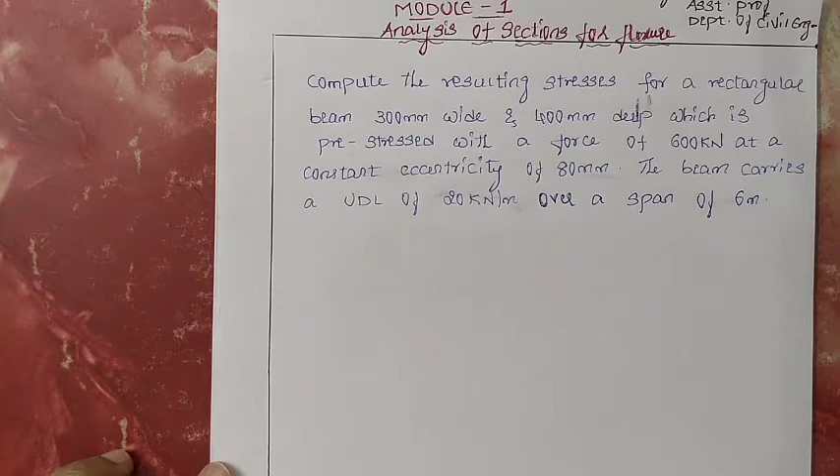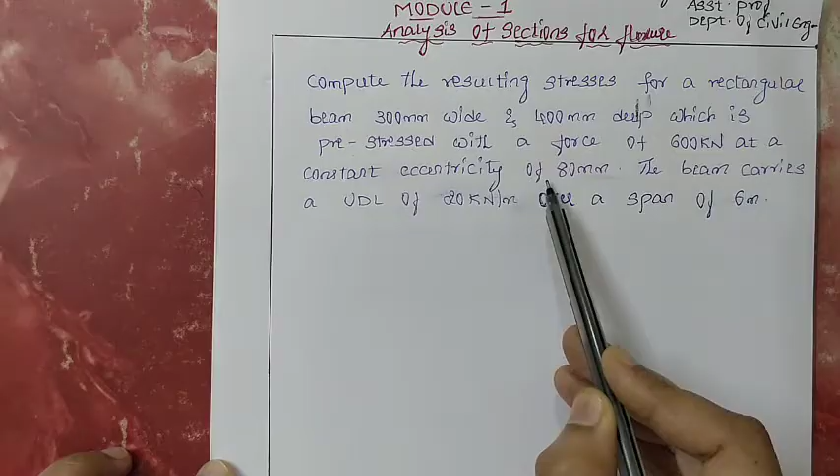The first problem: Compute the resulting stresses for a rectangular beam 300 mm wide and 400 mm deep, which is pre-stressed with a force of 600 kN at a constant eccentricity of 80 mm. The beam carries a UDL of 20 kN per meter over a span of 6 meters.

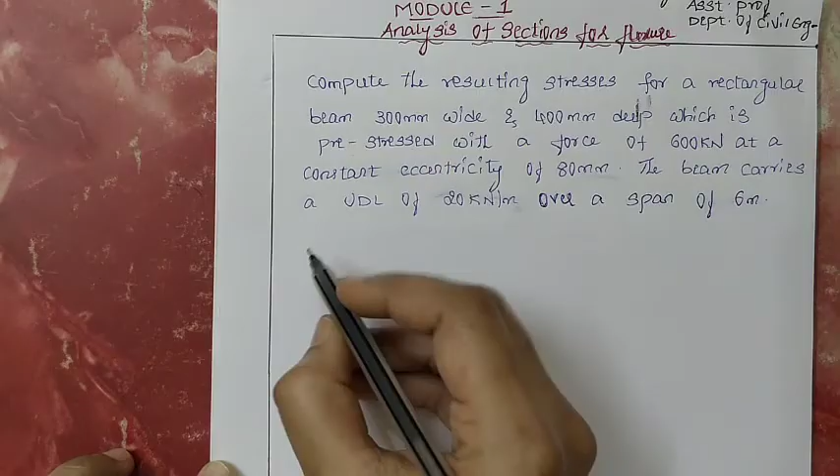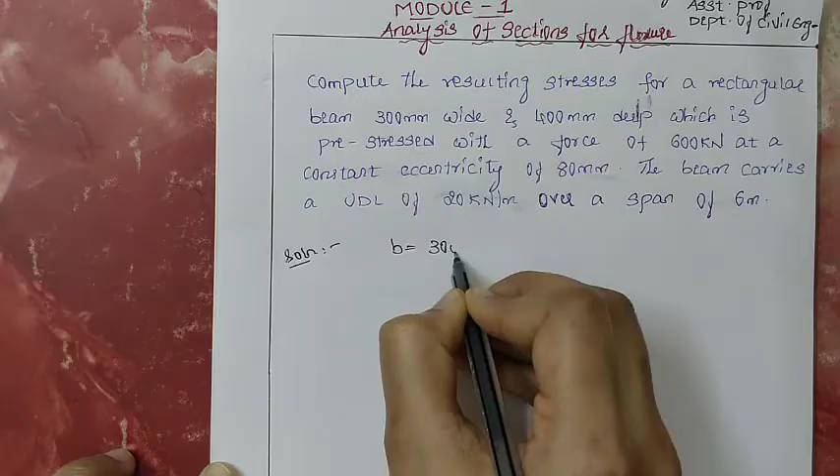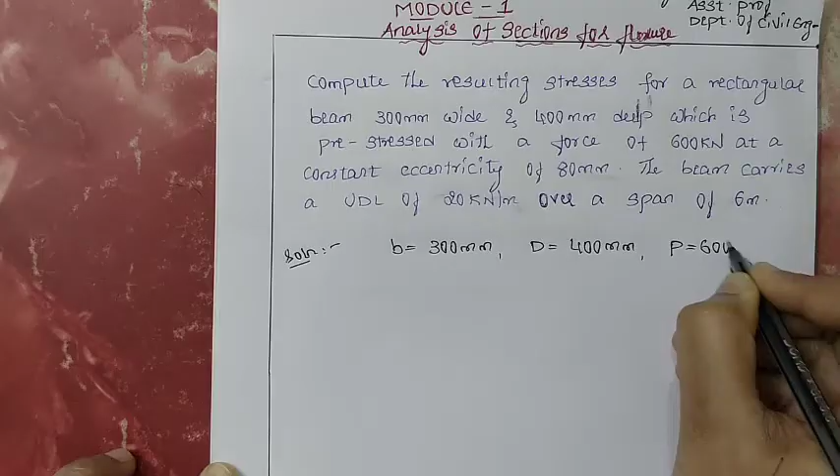The first step is to write down the given data. The cross-sectional dimensions of the beam: width is 300 mm, depth is 400 mm, and the pre-stressing force given is 600 kN, acting at a constant eccentricity, denoted by e, of 80 mm.

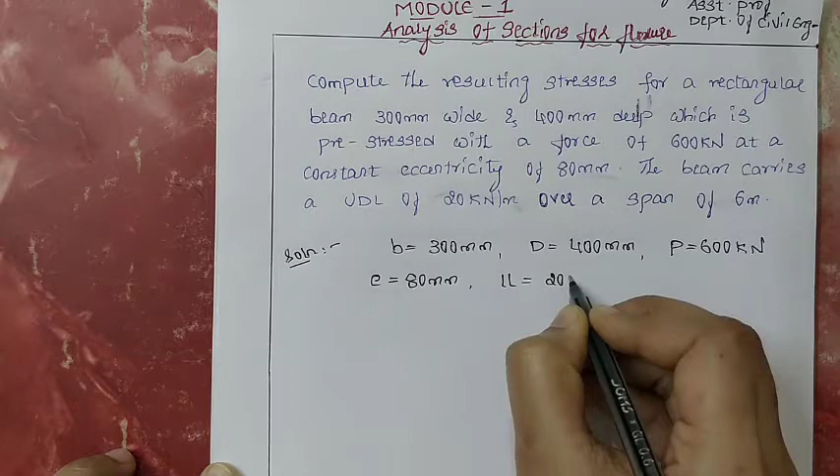The live load condition given: it carries a UDL of intensity 20 kN per meter, and the span given is 6 meters.

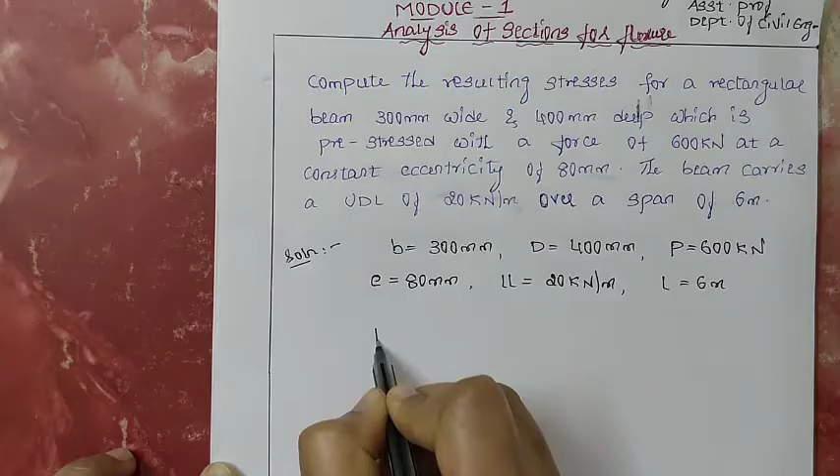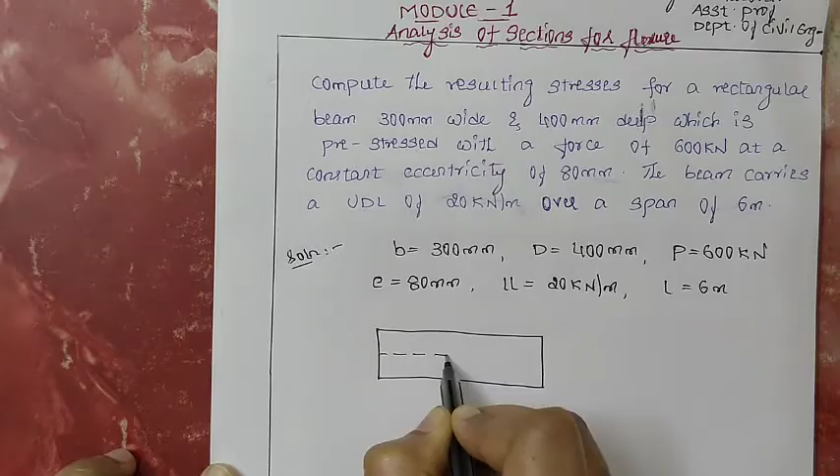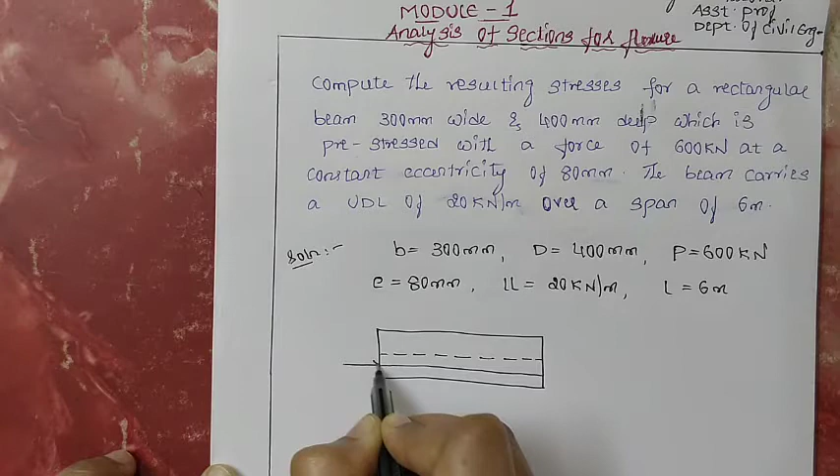I will draw the figure: the cross section and the longitudinal section of the beam. This is a rectangular beam. This is the neutral axis. Below the neutral axis, you place the tendon. The magnitude of pre-stressing force is given, and it is specified with a constant eccentricity of 80 mm. It is understood that it is a straight cable.

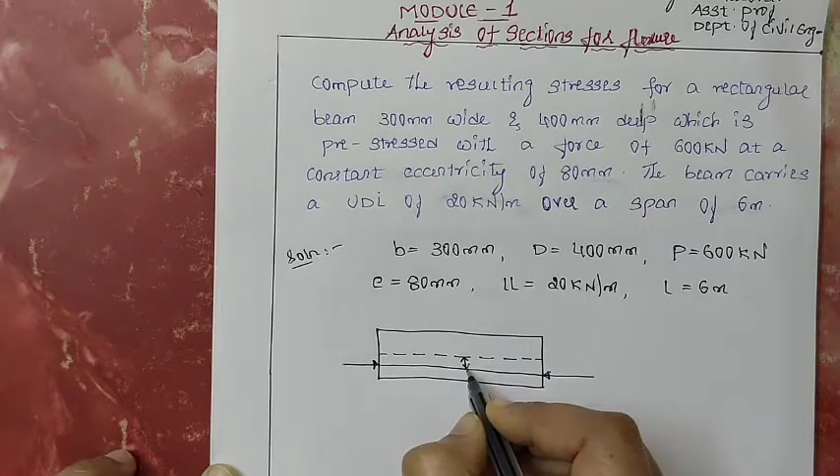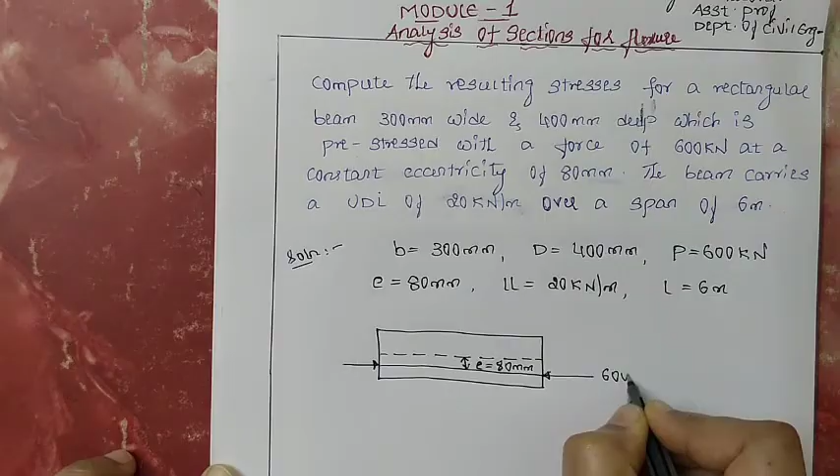Eccentricity is the vertical height from the neutral axis to the tendon - that is your eccentricity. That value is 80 mm, and the magnitude of pre-stressing force given is 600 kN.

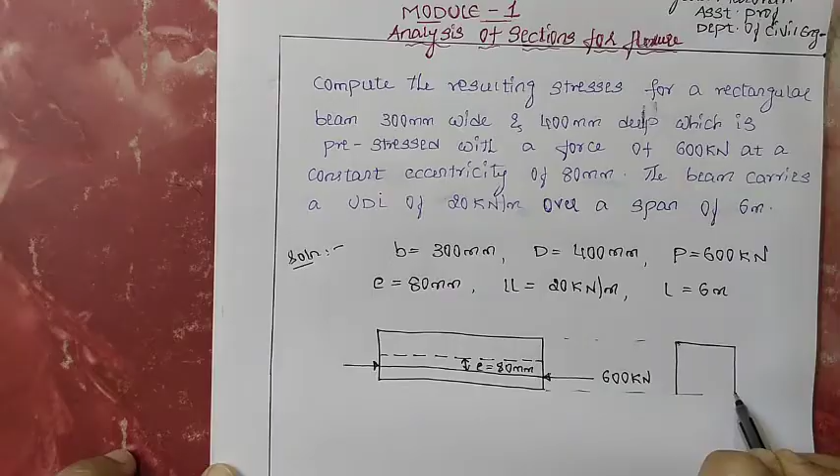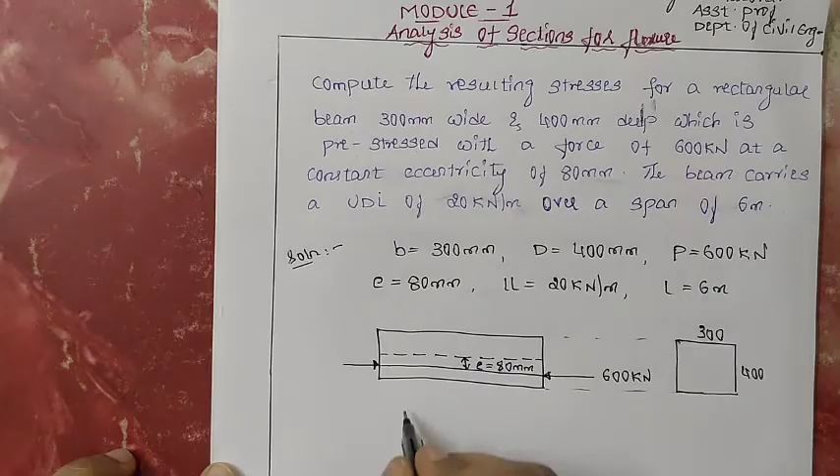The cross section of the beam: width is 300 and depth is 400. Assume the density of concrete as 25 kN per meter cube.

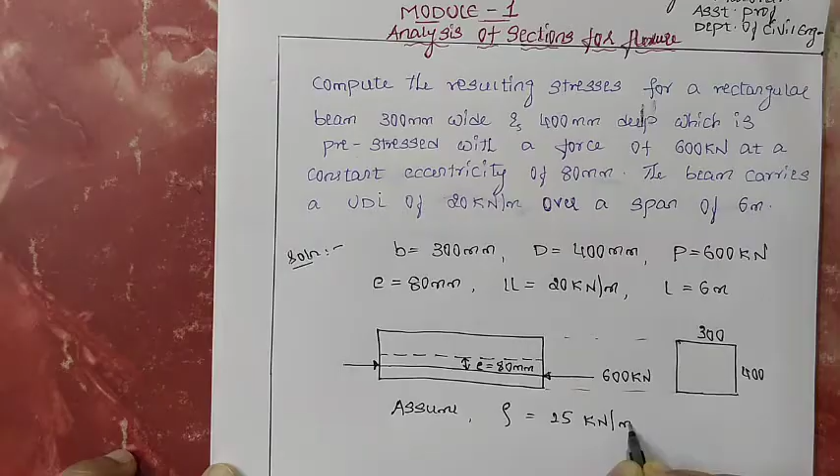You need to calculate the resulting stresses at the top as well as at the bottom.

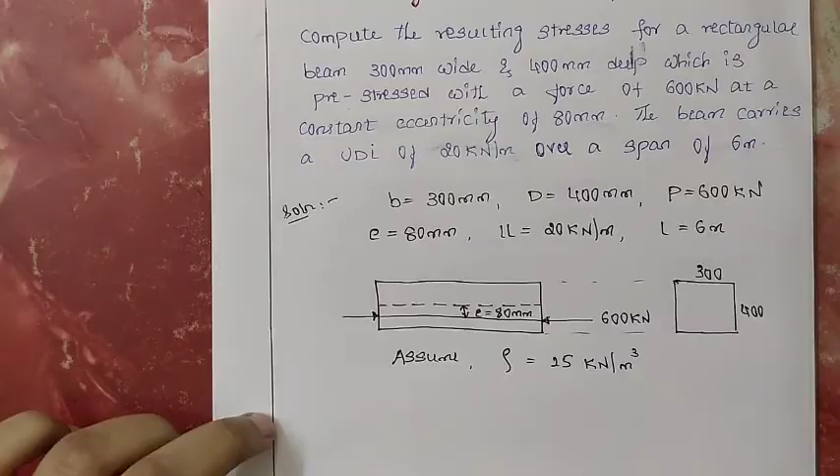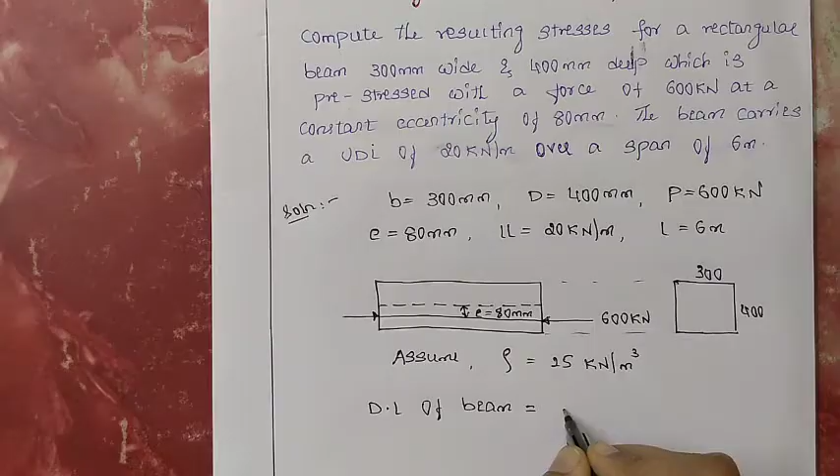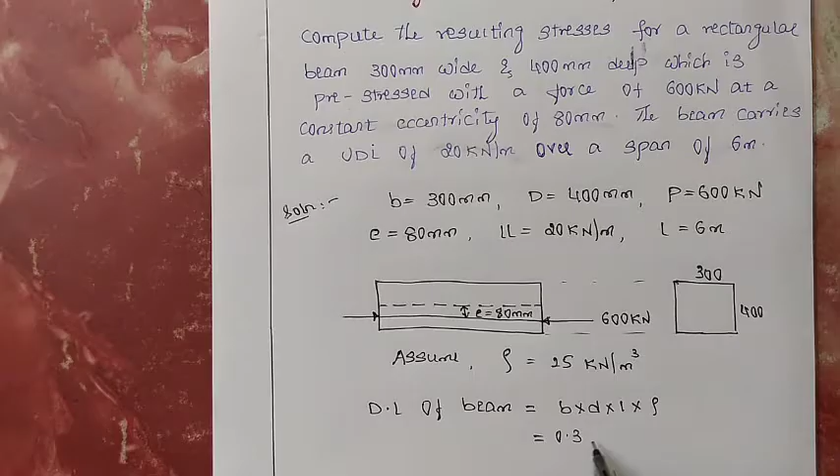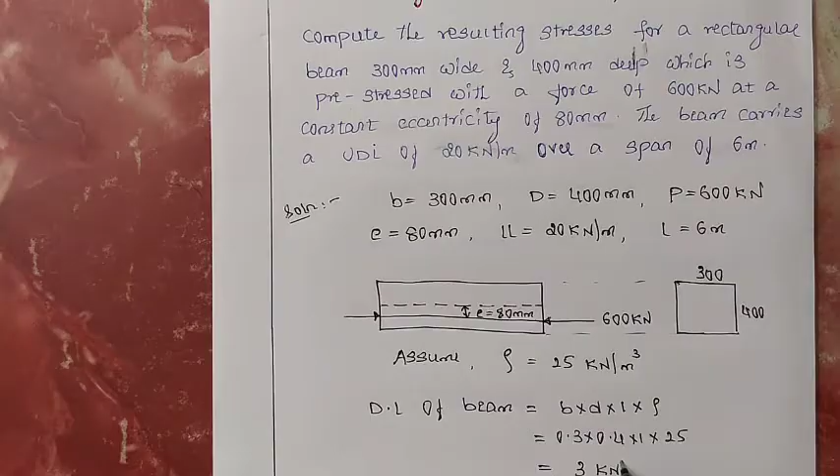First, calculate the dead load of the beam. Dead load of the beam is given by the cross-sectional dimension of the beam, B into D, into length (taken as 1 meter) and the density. Substitute values in meters: width is 0.3, depth is 0.4, into 1, into density 25. The dead load of the beam comes out to 3 kN per meter.

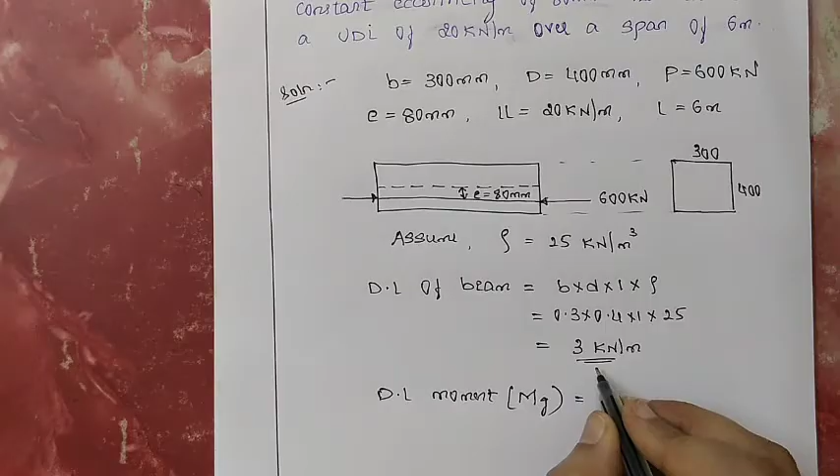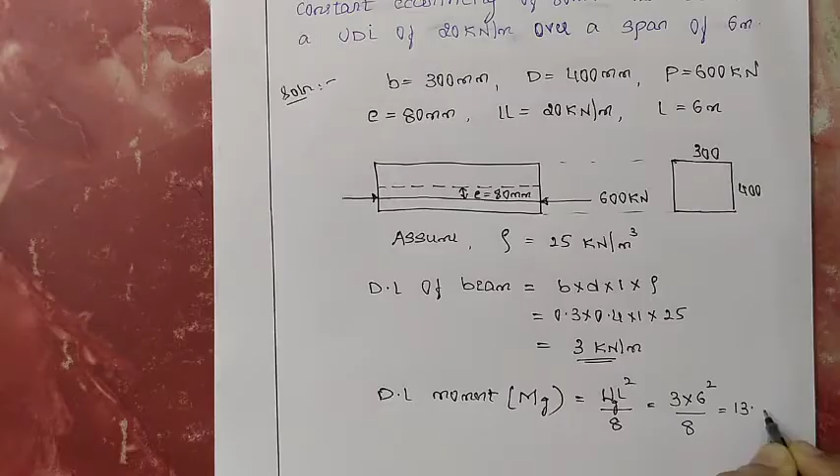Next, calculate the dead load moment, denoted by Mg. For a beam carrying UDL, the standard bending moment equation is WL square by 8. Here we are calculating the dead load moment, where the load is dead load, denoted by G, which is 3, and the span is 6 meters. So 3 into 6 square divided by 8 gives 13.5 kilonewton meter.

The live load given is 20 kN per meter - note the intensity of that live load is in kN per meter. Then the live load moment, denoted by MQ, equals WQ L square divided by 8. WQ is 20, L is 6, squared divided by 8, giving 90 - sorry, this is not per meter, it is kilonewton meter.

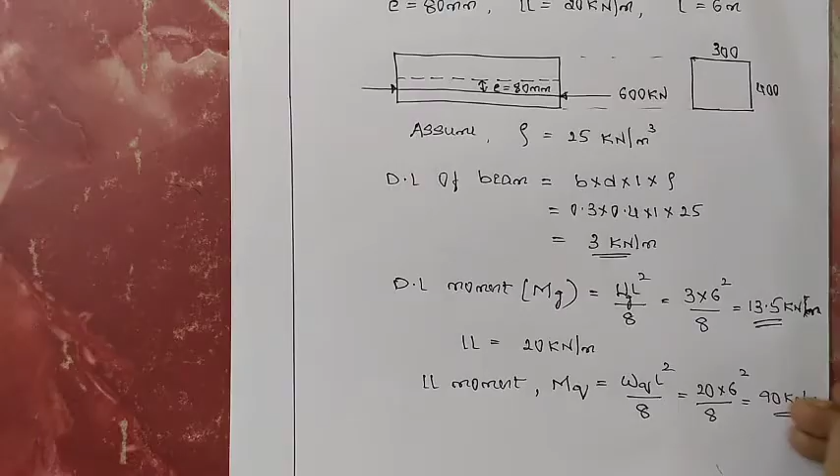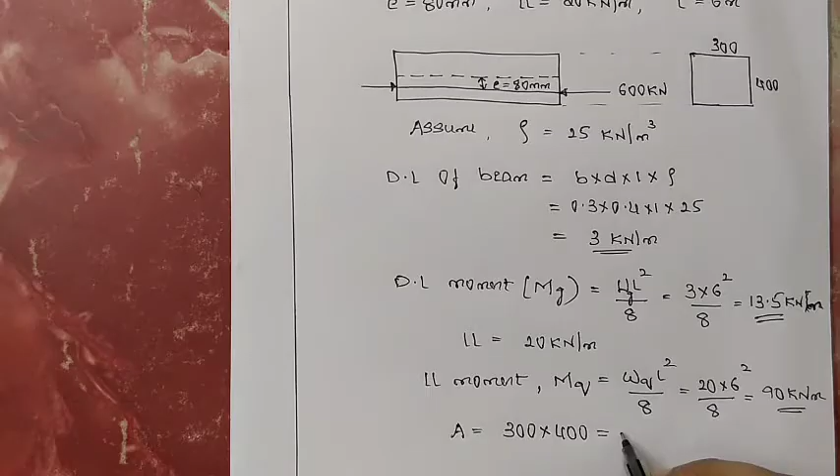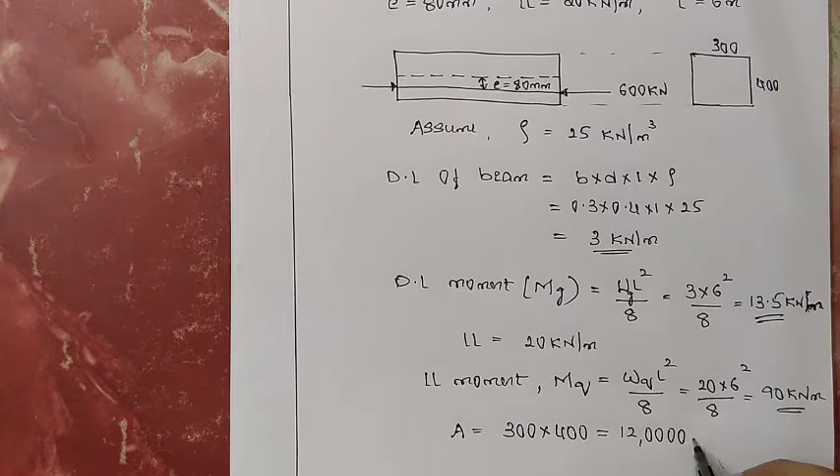Then calculate the cross-sectional area of the beam: B into D, that is 300 into 400. The section is rectangular, giving 1,20,000 mm square.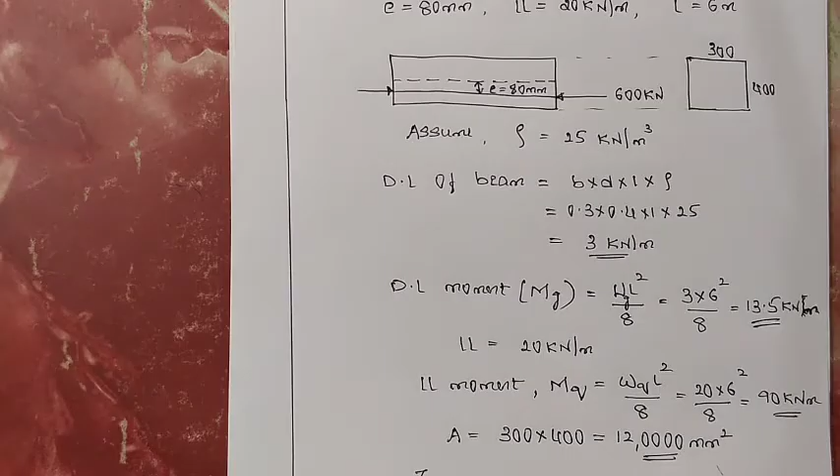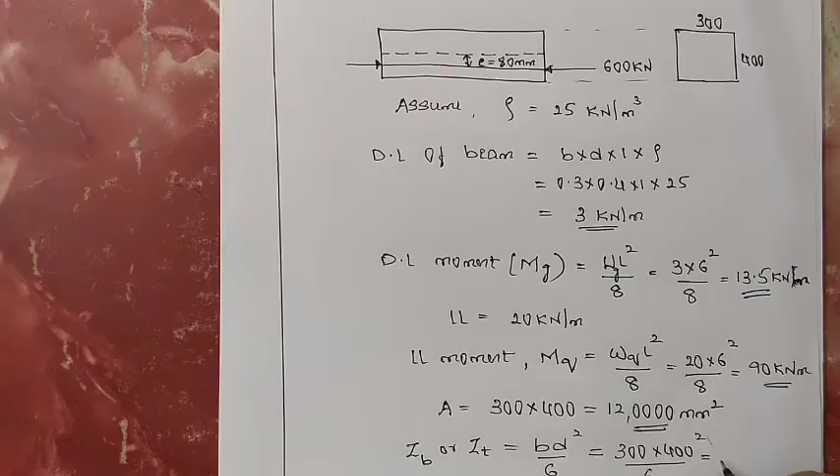Then calculate the section modulus. For a rectangular section, the section modulus at the top and at the bottom is the same: ZB or ZT equals BD square divided by 6. Substituting values, width is 300, depth is 400 squared divided by 6, giving ZB equals 8 into 10 to the power of 6 millimeter cube.

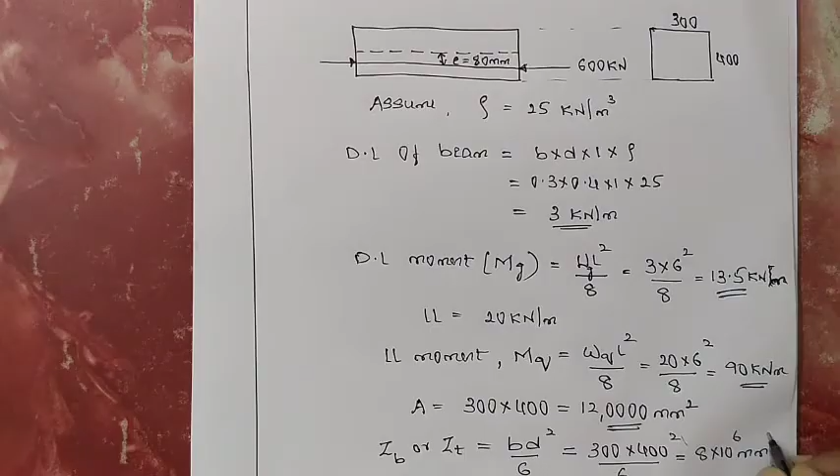Then calculate the resultant stresses at the top as well as the bottom fiber.

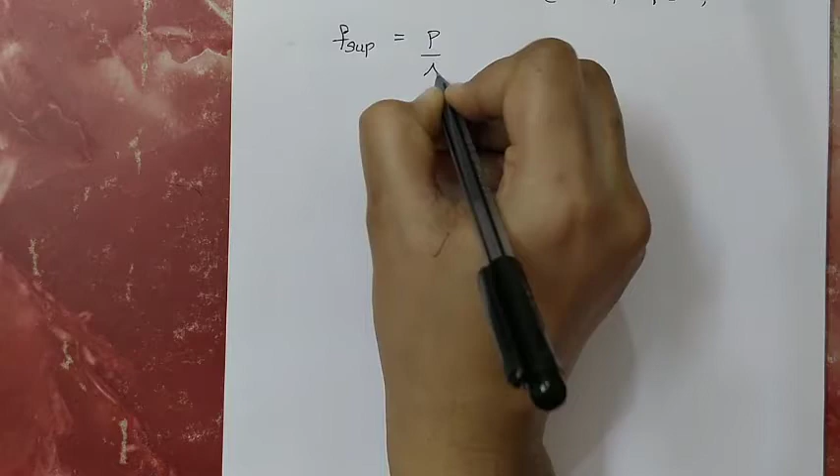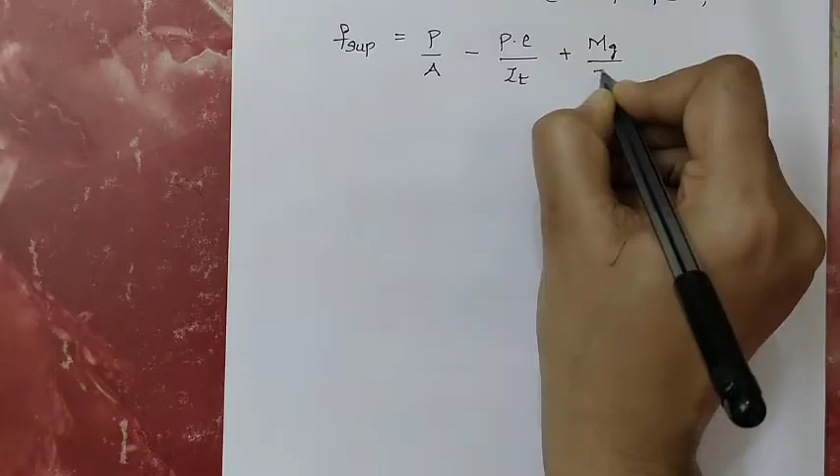Stresses at top fiber, it's given by F superior, or you can call it F top. It is given by P by A minus P into E divided by ZT plus mg divided by ZT plus mq divided by ZT.

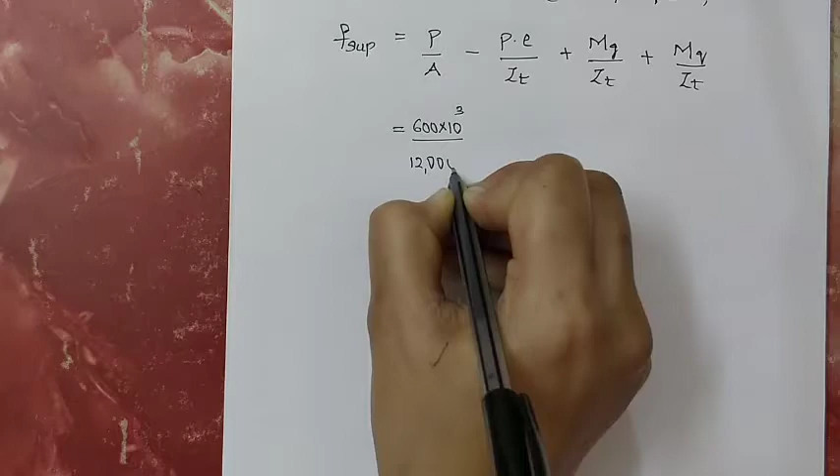Substitute all the values. That is, P is 600 kilonewton, it is 10 to the power of 3 divided by area 120000 minus 600 into 10 to the power of 3. Eccentricity value it is 80 divided by ZT it is 8 into 10 to the power of 6 plus mg value, dead load moment 13.5 into 10 to the power of 6 divided by 8 into 10 to the power of 6 plus live load moment, it is 90 into 10 to the power of 6.

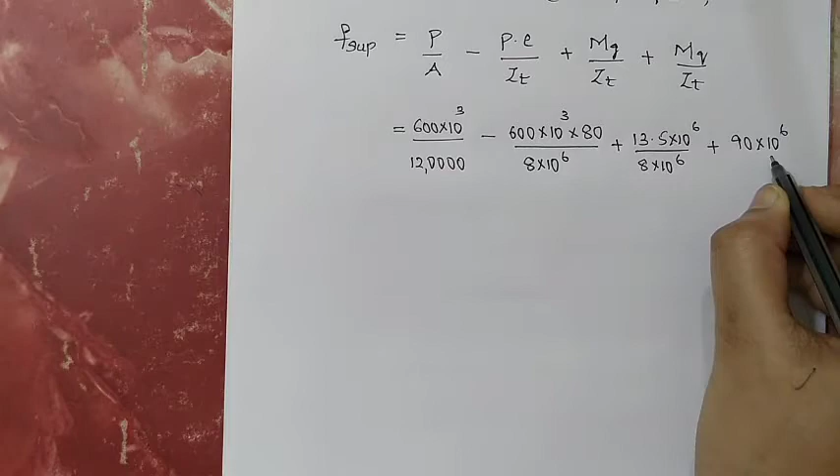10 to the power of 6, what is that? The moment will be in kilonewton meter. While substituting in this F superior equation, all the units should be either Newton mm or mm. That is 8 into 10 to the power of 6. Upon simplification, you will get F superior, that is resultant stresses at the top.

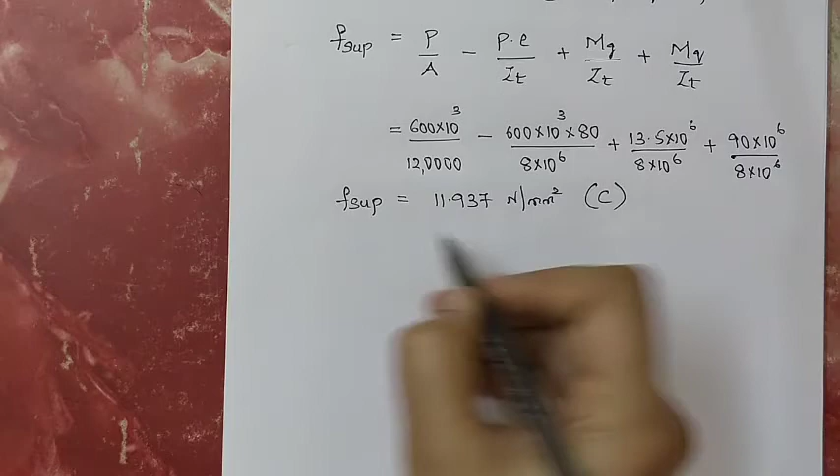It will be 11.937 Newton per mm square. Positive indicates it is compressive in nature. This is your F superior.

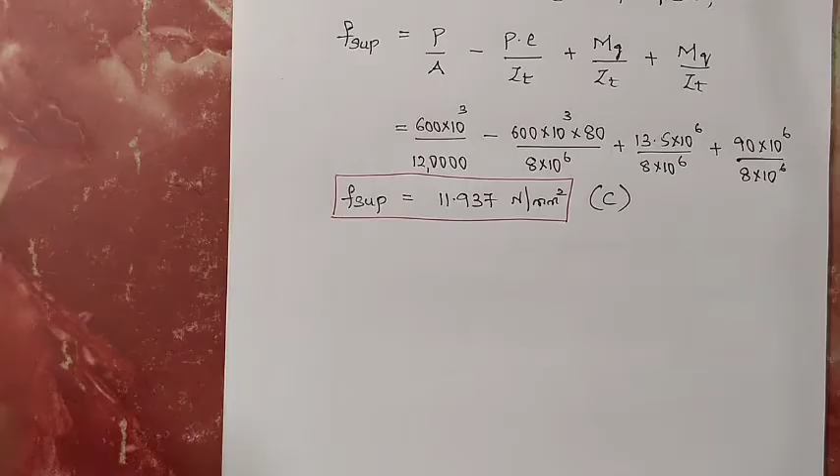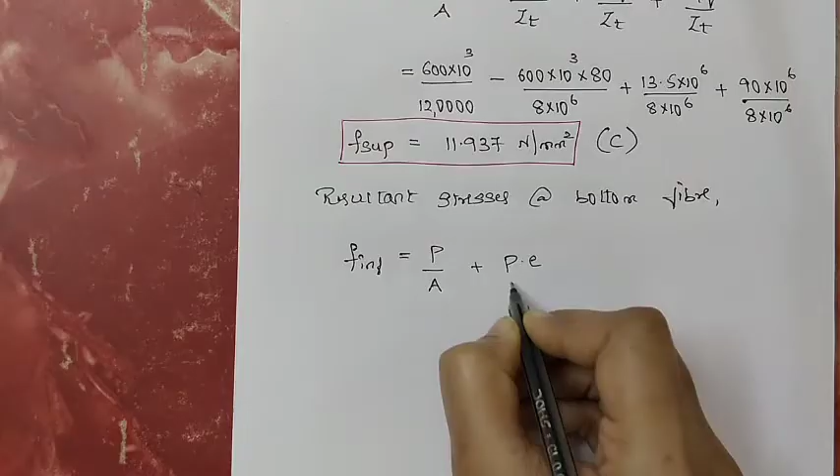Next, similarly calculate resultant stresses at bottom fiber. Resultant stresses at bottom fiber. It is denoted by F inferior or F bottom, that will be equal to P by A plus P into E divided by ZB minus mg divided by ZB minus mq divided by ZB.

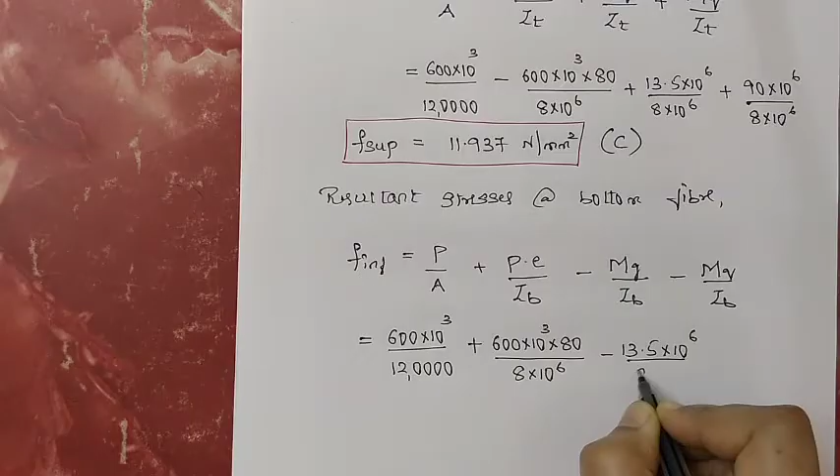Substitute the value, that is P is 600 into 10 to the power of 3 divided by 120000 plus 600 into 10 to the power of 3, eccentricity value it is 80 divided by 8 into 10 to the power of 6 minus 13.5 into 10 to the power of 6 divided by 8 into 10 to the power of 6 minus 90 into 10 to the power of 6 divided by 8 into 10 to the power of 6. Upon simplification, you will get F inferior as minus

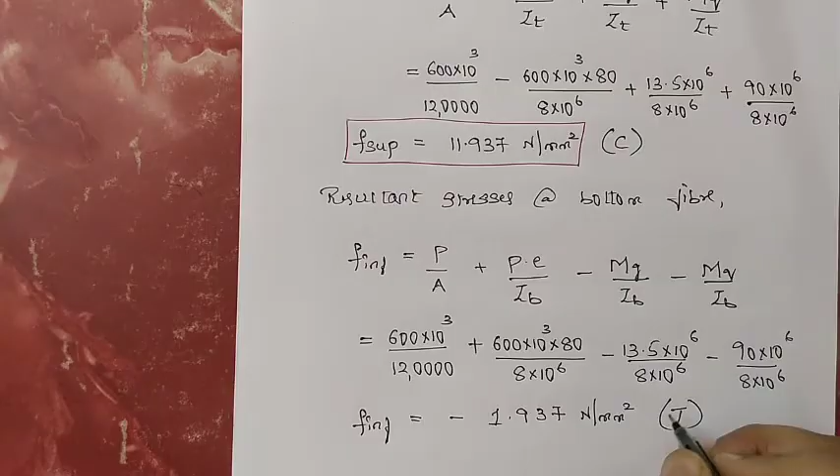1.937 Newton per mm square. Negative sign indicates it is tensile in nature. This is your F inferior or F bottom.

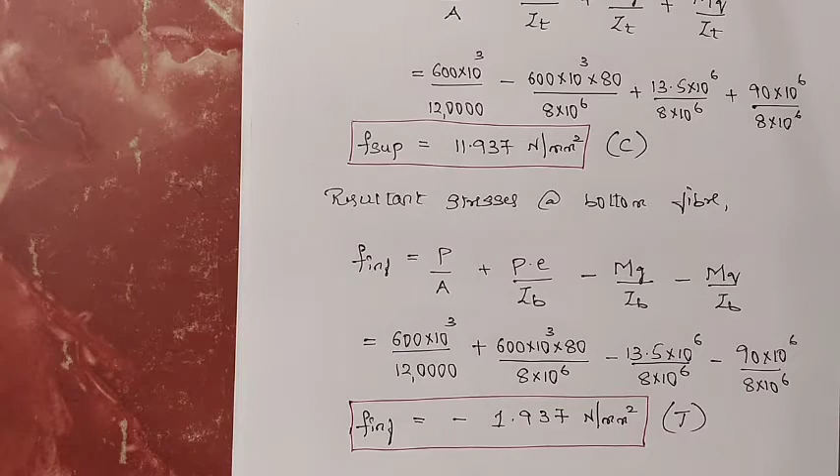Next, you need to draw the stress diagram for both at the top as well as at the bottom.

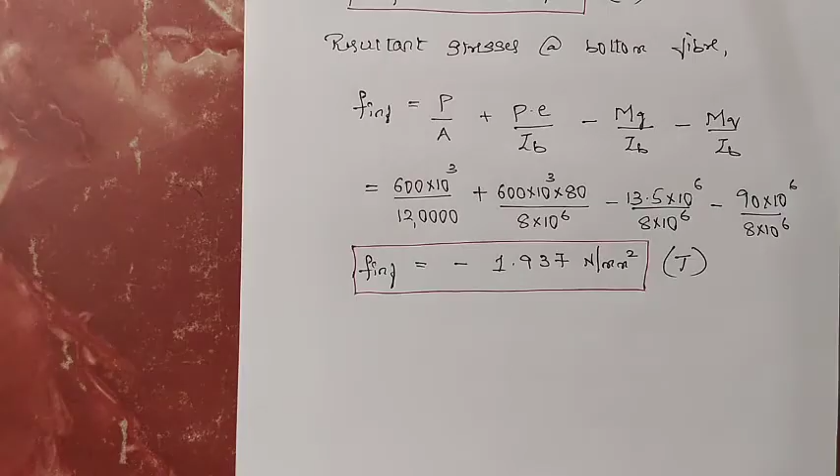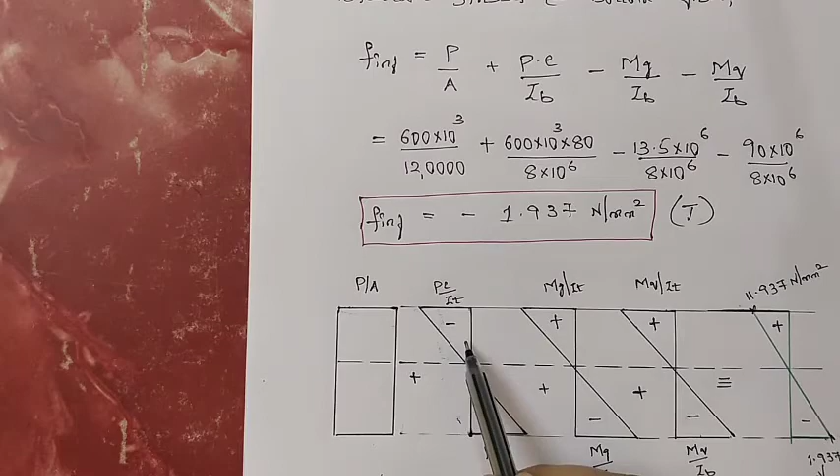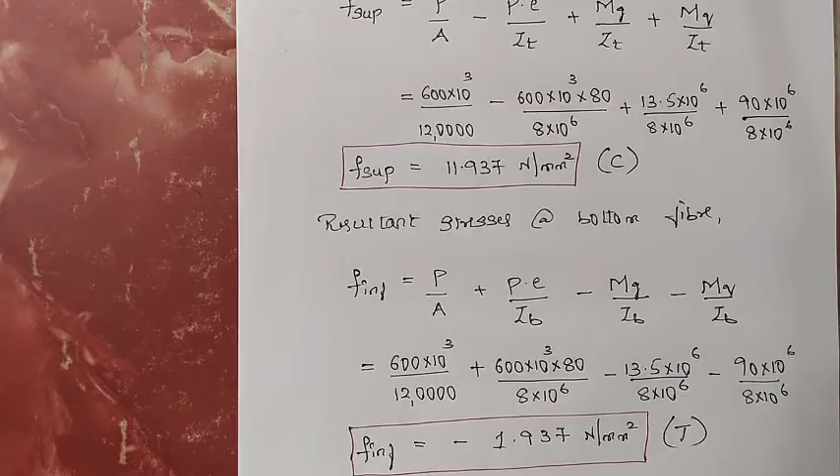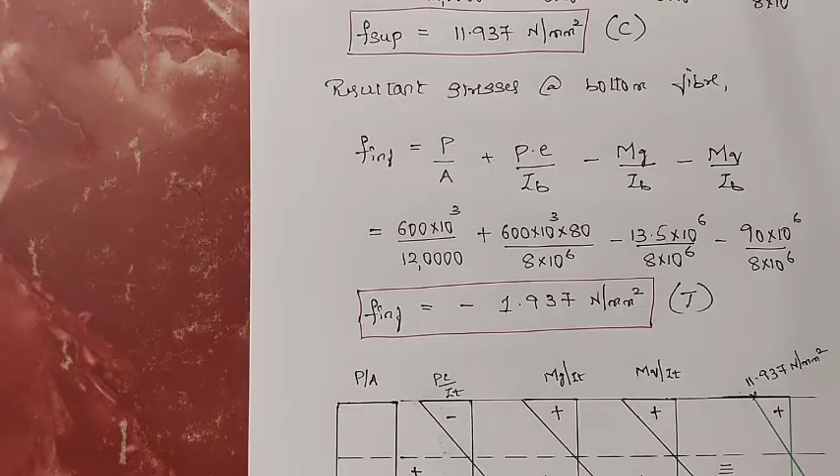That is minus PE by IT. Minus indicates it is tensile in nature, and positive indicates it is compressive in nature. This is the stress diagram due to pre-stressing force, and the stress diagram due to dead load. It will be in the shape of a triangle. Similarly, the stress diagram due to live load and the resultant stresses.

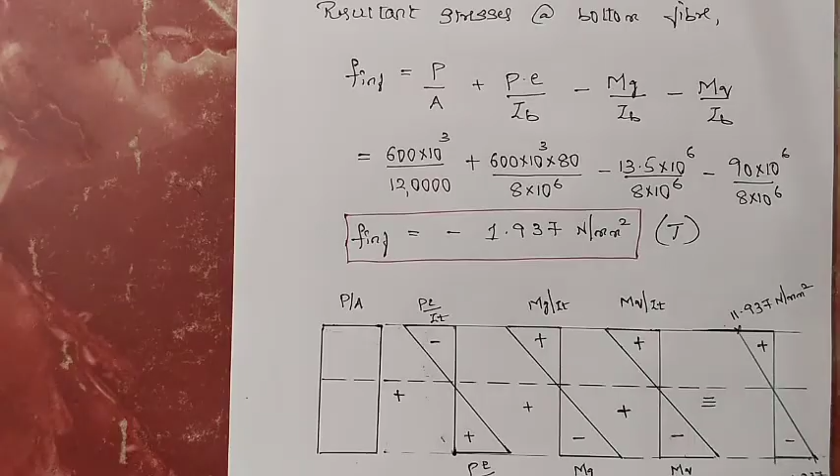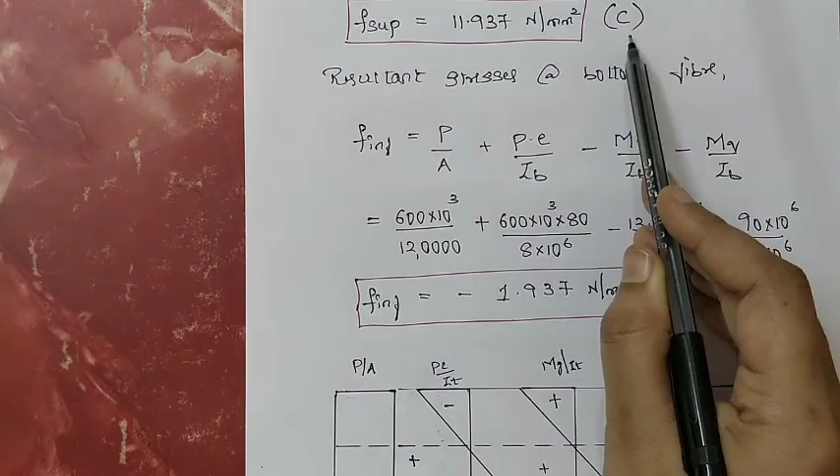You can observe here F superior at the top, it is positive. Positive means it is compressive. For the sign convention, positive means towards your left side, negative means towards your right side. You can observe here the vertical line is the reference line.

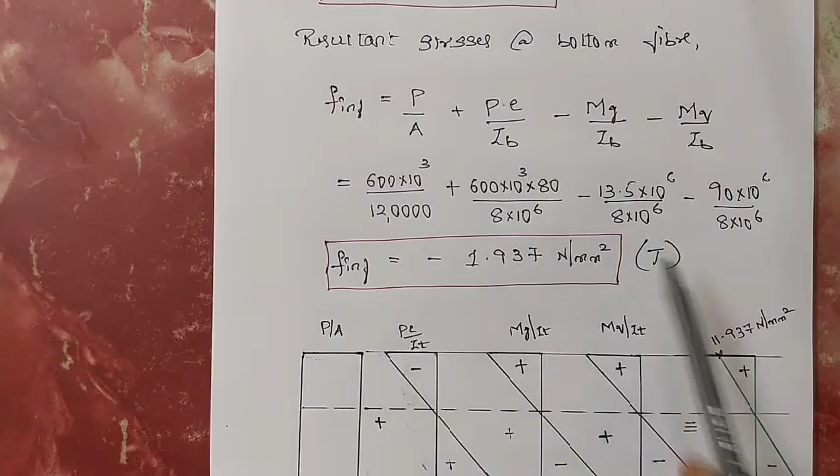F superior is what? Positive. I have shown that value towards the left side. Then the F inferior, it is negative value. I have shown the value as towards my right side. That is the sign convention. Tensile, it is negative towards your right side, and compressive, it is positive towards left side.